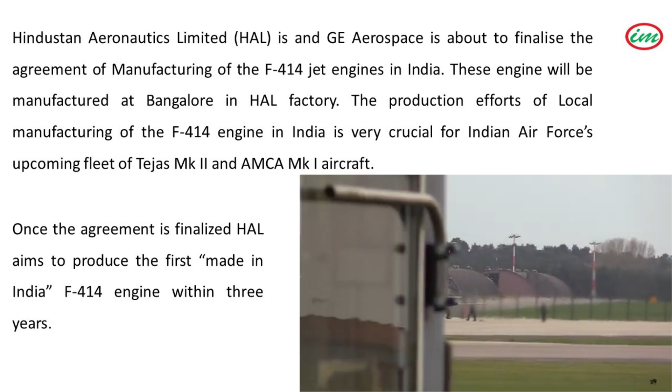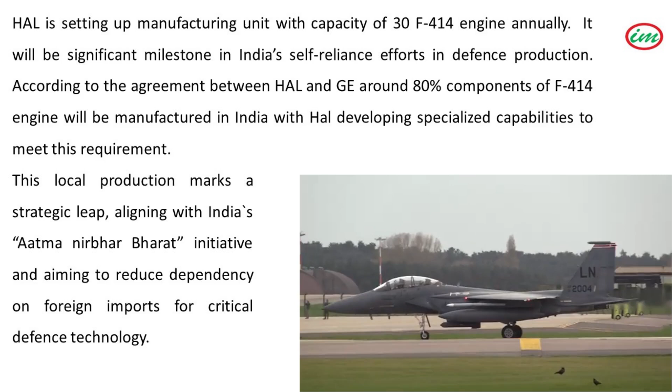Once the agreement is finalized, HAL aims to produce the first made-in-India F414 engine within 3 years. HAL is setting up a manufacturing unit with a capacity of 30 F414 engines annually, a significant milestone in India's self-reliance efforts in defense production.

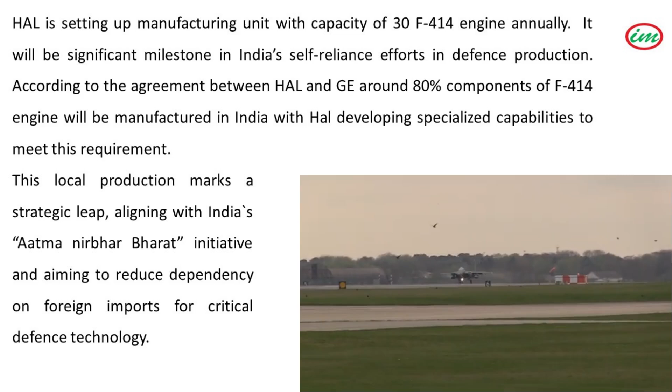According to the agreement between HAL and GE, around 80% of the F414 engine's components will be manufactured in India, with HAL developing specialized capabilities to meet this requirement. This local production marks a strategic leap, aligning with India's Atmanirbhar Bharat initiative and aiming to reduce dependency on foreign imports for critical defense technology.

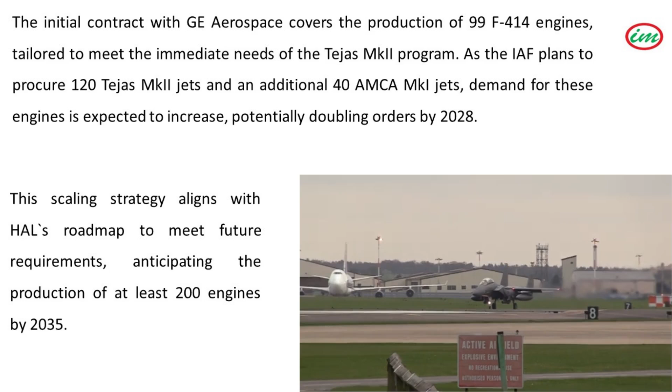The initial contract with GE Aerospace covers the production of 99 F414 engines, tailored to meet the immediate needs of the Tejas Mk2 program. As the IAF plans to procure 120 Tejas Mk2 jets and an additional 40 AMCA Mk1 jets, demand for these engines is expected to increase, potentially doubling orders by 2028.

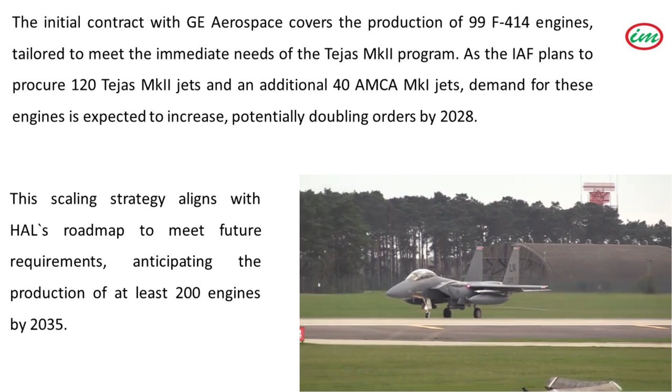This scaling strategy aligns with HAL's roadmap to meet future requirements, anticipating the production of at least 200 engines by 2035. Beyond initial deliveries, HAL's production facility will continue to manufacture F414 engines over the coming decades.

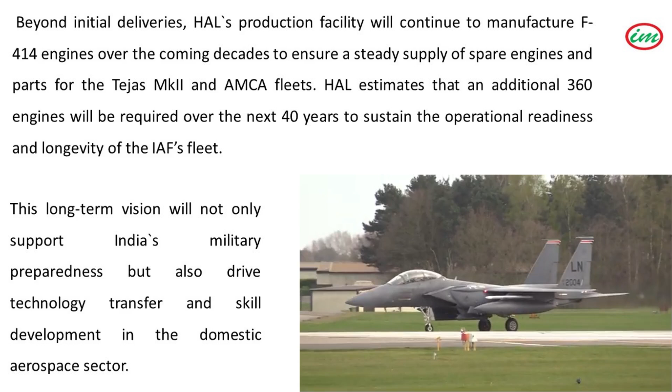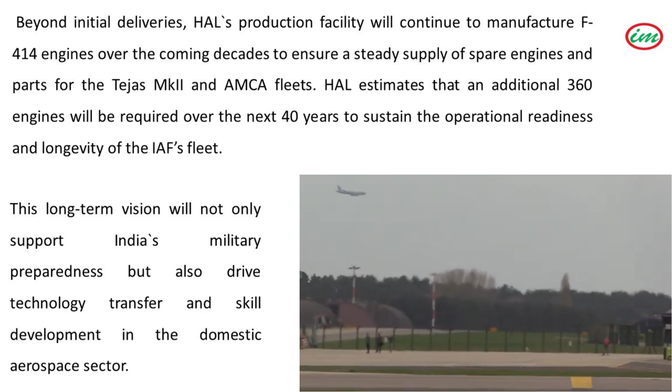This will ensure a steady supply of spare engines and parts for the Tejas Mk2 and AMCA fleets. HAL estimates that an additional 360 engines will be required over the next 40 years to sustain the operational readiness and longevity of the Indian Air Force's fleet. This long-term vision will not only support India's military preparedness but also drive technology transfer and skill development in the domestic aerospace sector.